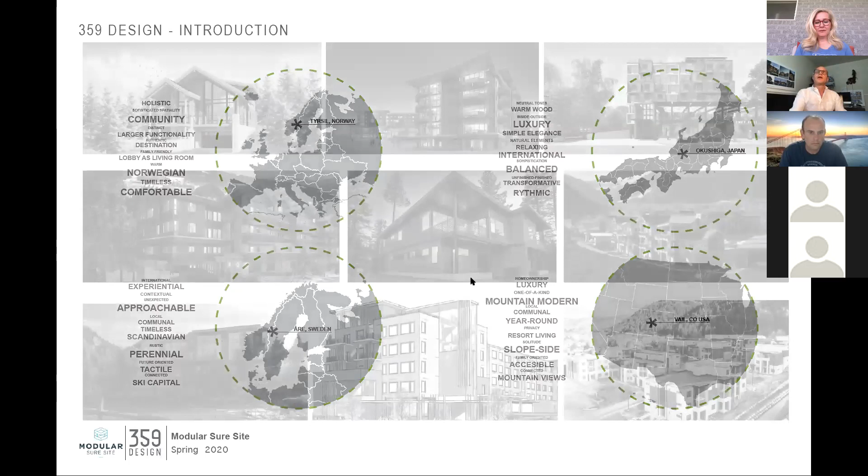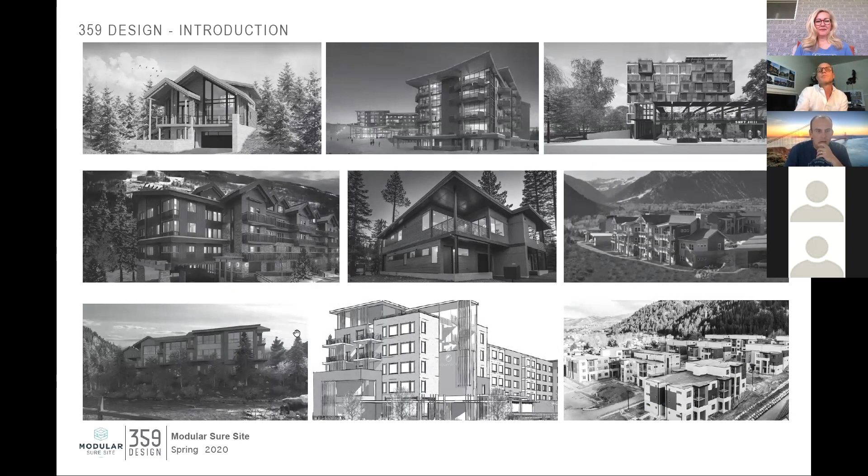Just a little smattering of some of the work we do, to give you an idea of scale, shape, texture, form. Most of these projects I'll give a little snapshot on, but let's just start thinking about that. We're not going to spend a whole lot of time in this world here - we'll get into this world, but we really like these in the middle here and these all around. So that's what I'll be basing my conversation on.

So why modular, and why did we get into it? This site plan you see in front of you is Chamonix in Vail. We, and also I, have a long history in Vail. I lived in Vail between my undergraduate in college and going to University of Pennsylvania for my architecture degree. I'm a homeowner in Vail, and have spent time in resort climates, in affordable housing and workforce housing. We've established a great relationship with the town of Vail, with Eagle County, with the councils and commissioners, and have worked a fair amount on workforce housing. So if there's one of those pocket places where it works, Eagle County is good.

But the Chamonix site - we had been working on it for about a year and a half, going to the council with a number of options.

Short side of the story is that they had overpaid for the land, and then only had a certain amount within their budget. And they said, absolutely, line is drawn here.

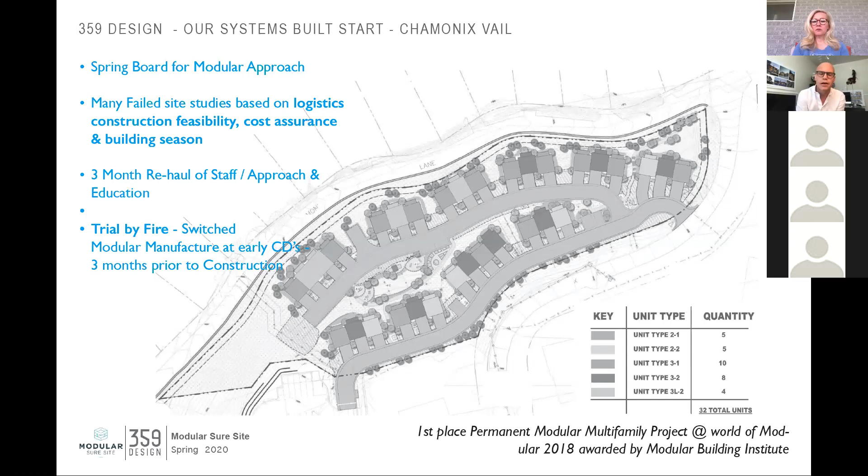Anyway, at the end of the day, we got the project done. Some folks online were involved in that project, and this recently won first place as a permanent modular multifamily project at the World of Modular in 2018 by the Modular Building Institute.

So on to volumetric modular. So what have I been talking about? What is, for those that are somewhat familiar, somewhat not familiar.

Well, you know, in the way that we go and the way our world goes, we tend to, unless we get into our resort side, tend to build with wood. And building with wood, there are a number of different ways that you can get this done. You can stick frame it. You can, you know, go out, hire somebody, stick frame it. You can builder developer it, which means that, you know, on board, you've got some efficiency from your staff, and that's going to sometimes lower the cost of the project, lower the time, lower the experience of the project.

And then we have systems built, right? So systems built, for those unaware of the term, systems built talks about all of these things. It talks about modular, it talks about volumetric modular, it talks about panelized. It talks about things that are done within the factory or within some sort of controlled environment and are put together in parts.

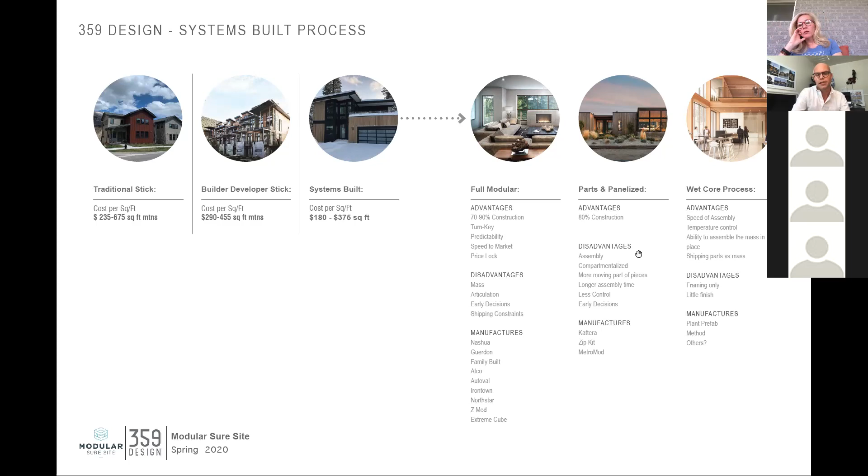It's not the individual sticks, but it's panels, it's pieces, it's larger things. So, you know, as we start to look at that, you see that we have full modular, we have parts and panelized that we dabble in from time to time. And then another piece that we're starting to go for certain projects, and we'll see where this goes, is a wet core process, which is basically a combination of modular and panelized. So where we get the wet pieces of the building, put those in modules and do those, and then we have shells and panels that go around them.

So we're here to talk about volumetric modular. Volumetric modular, great for these types. For single family, it's great for hotel, it's great for multifamily living, affordable 2-story walk-up, 3-story walk-up, 4 stories with a corridor, type 5, type 3 construction, all of those things, okay? We like to, with our product, like to get into the 60% range, where I can say 60% and above is being done in the plant, and we'll talk about why I like to do that.

So, volumetric modular, a couple diagrams here. This is what is called a module. For those that are very familiar, just bear with me for a second here. The module is this piece, and it's, you know, anywhere, you can make them as small as you want, but your efficiency is going to get killed if you go under a certain range. But 8 to 16 feet wide. Some plants do them as 19 feet 6 inches and up to 76 feet or so. This that we're looking at is considered a module.

In the next bit, I will show you what a saw box is, for those of you that have heard that piece. As this goes down the line, some of my favorite plants out there have 20 and 30 stations as they go along. They start with a floor, they put in interior walls, they put on their exterior walls, they put on their upper part, and then they move and they move and they move.

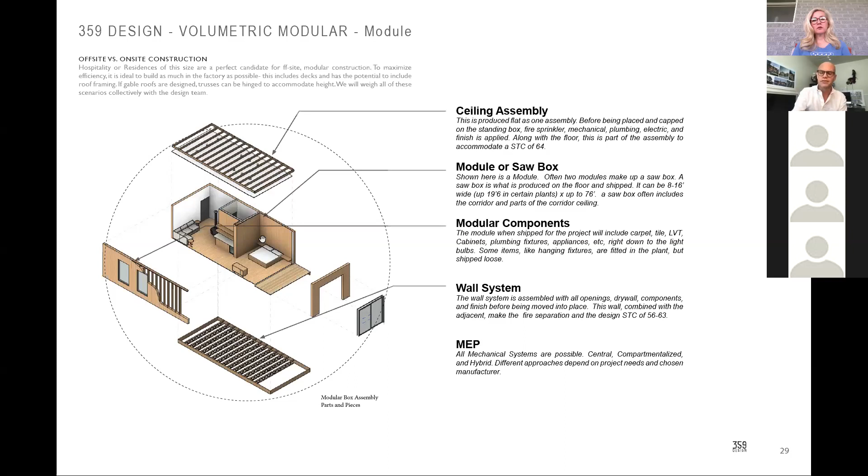You have to be aware of the permitting process. Different states have different permitting. In general, the box, the module I showed you before, goes through the state, and the rest of these pieces - the foundation, the skin, the roof - typically go through the local environment. In some places, that's also in the state environment, but it's a different department.

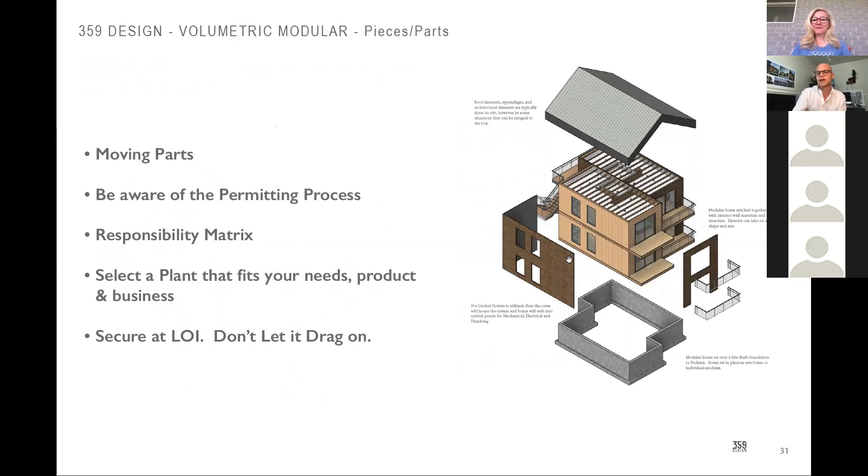Select the plant that suits your needs, right? And when you come to this, secure your LOI. These are just big things, but I'll talk about them further in a minute here.

This here is a saw box. A saw box tends to be a little bit more efficient. As you can see, we've got now two pieces, more building mass. When you start to put these together, you're setting two boxes at once, as opposed to one box at a time. So your time on the site is a lot less.

So you see this, these can get long, they can get wide, they can get very heavy. For the setters out there, as you start to see these come around at, you know, 16 feet wide and long, they're big. At a recent project, we had some townhomes, and I'll show you it, where the boxes that went down the road were 19'6" by 72 feet. That's a really big and really, really heavy box for those that know it.

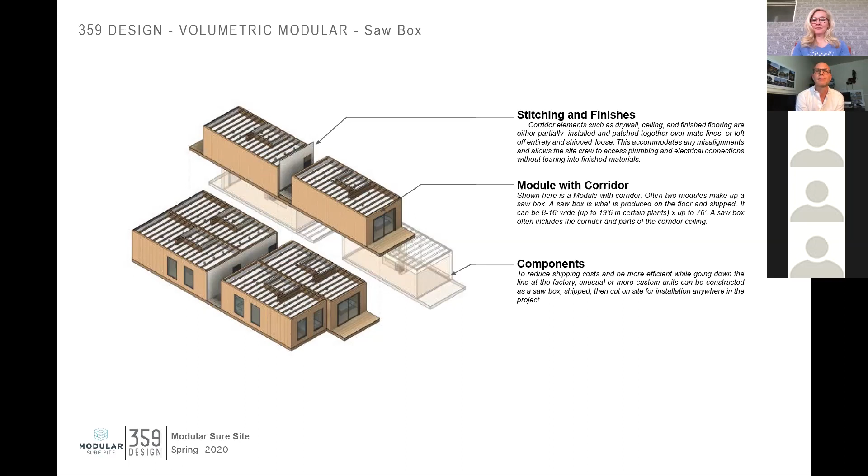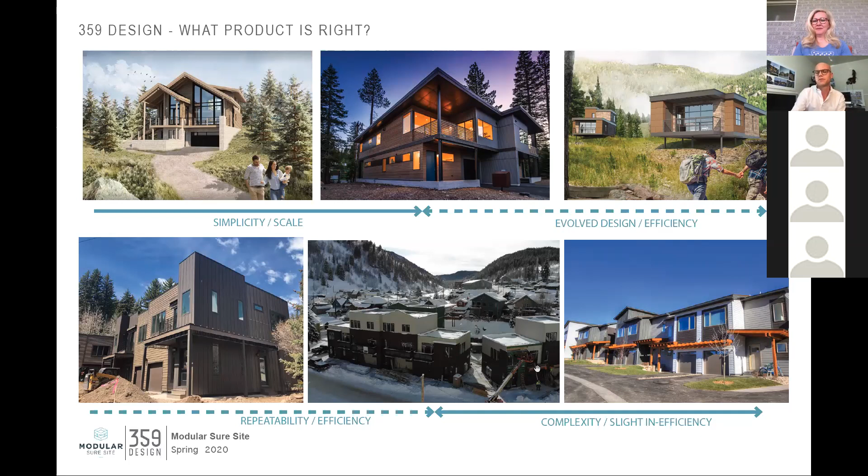As you can see, it requires some of the decks, some of the outer pieces on there. We'd like to integrate those as much as we can. You can see we were able to do it here on this, but these, we couldn't quite get it, so that goes into slight inefficiency.

So now as we step up in scale, we're starting to cook a little bit. This is the Chamonix project that I talked about in Vail, 32 units. Interesting in the townhomes, but I think the number of units, the building season, all of that stuff and all those pieces allowed us to do a really good job. I had a great team on that between Nashua and Ari Nelson in Vail, working on that.

Next to it now, we're starting to get into what we like, right, where we get great efficiency. 3-story walk-up, wood frame, so 3 stories, no elevator.

This one starts, you see that I've got a little bit of a solid line in there. Reason I do is because I'm on a sloping site and I've got some complications as I come within there, setting my boxes a little bit subgrade. So that's getting a little bit technical, so I'm going to move on to the other piece, the Georgetown project.

Georgetown, and you'll start to see this going up on the road right now. This is on I-70, hard to miss. The first 12 townhomes went up last summer, and on it right now you'll see there's a hotel going in there and a brewery being constructed. The units that are up there right now, 12 units.

So I'm going to talk about two different project approaches here. There are a number of ways to do projects, a number of ways to come up with your design, come up with the most efficient approach. I'm going to talk about two of them. There are hundreds, right? But we'll talk about what gets us, what starts to get us, what I'm calling here a holistic project.

This project is a project that we're currently involved in right now that is in Lake Tahoe. It is a hospitality-based project. In this, we really get into it and everyone's gung-ho. What is the best solution? Which way do we look at this, right? Which way do we do it?

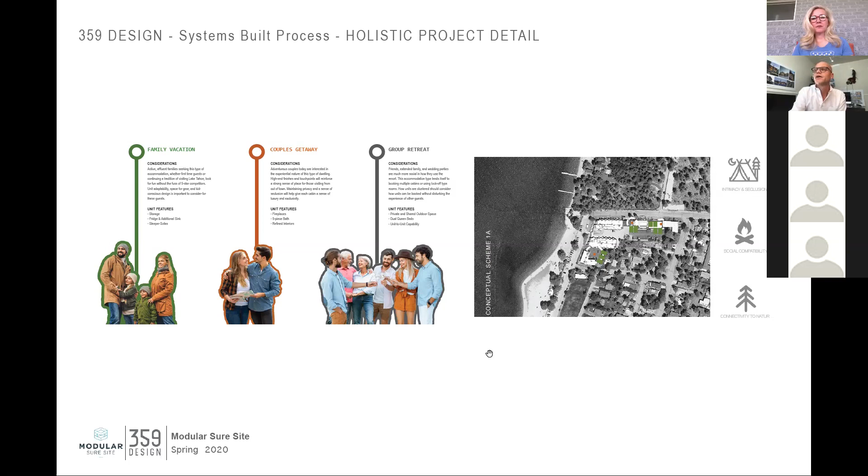For us, the way that we approach this is we look at the demographic. We look at who is going to be there, who's going to be using it, what are they going to think about if it does go to modular, about sleeping in modules? Are they going to think it's weird? Are they going to not want to do it? Probably not, but those are things that we consider and questions that are asked. What are we looking to do? What are our themes as we go through?

We come up with an architectural precedent. We come up with look, taste, feel. Where does this go? What does this start to do? And we start to steer this into something of design.

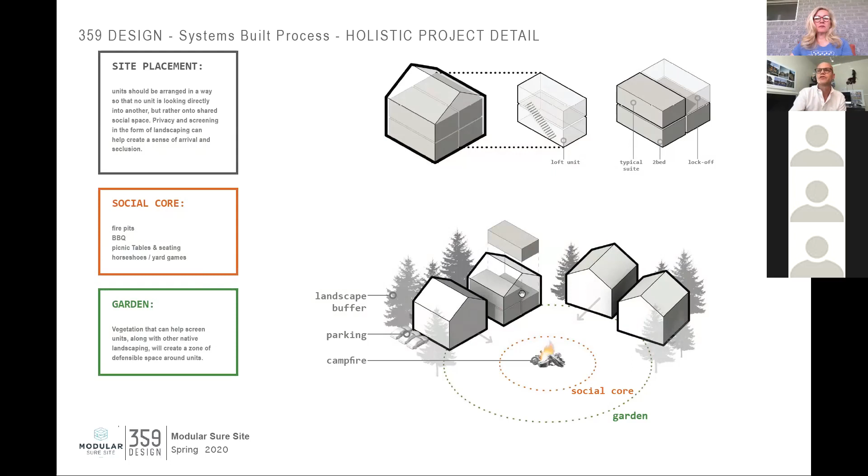We then come up with somewhat of a parti from there. We build these things around, and as you can see, we started to say, what do these hospitality cabins look like? How do we start to build them? What are their shapes? How do they get put together? What's really important within them?

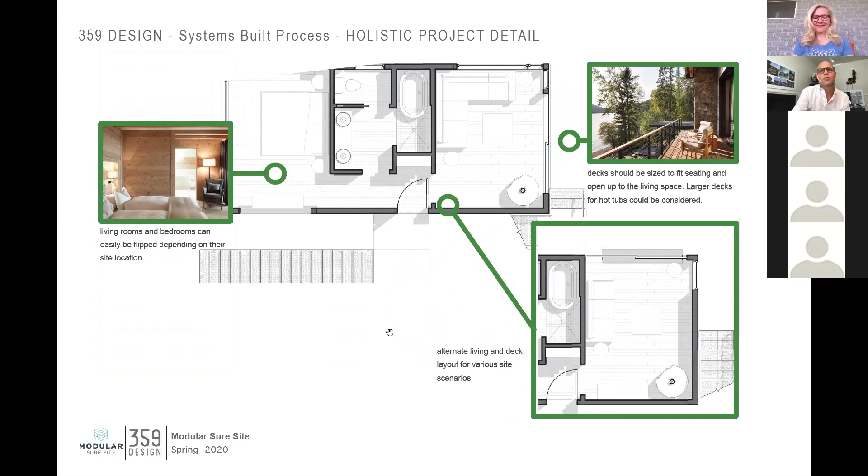We then go develop a unit plan. This unit plan, as you can see, based on modules, based on interchangeable parts, is going to work really well for us. We take those, and we then stack those into architectural form. This is all taking everything that we learned before.

Now everybody's got something that everybody believes in, everybody does it. This is where we somewhat say, end of concept design, let's move on, let's start to get this into pricing, but we know we can do this in modular construction.

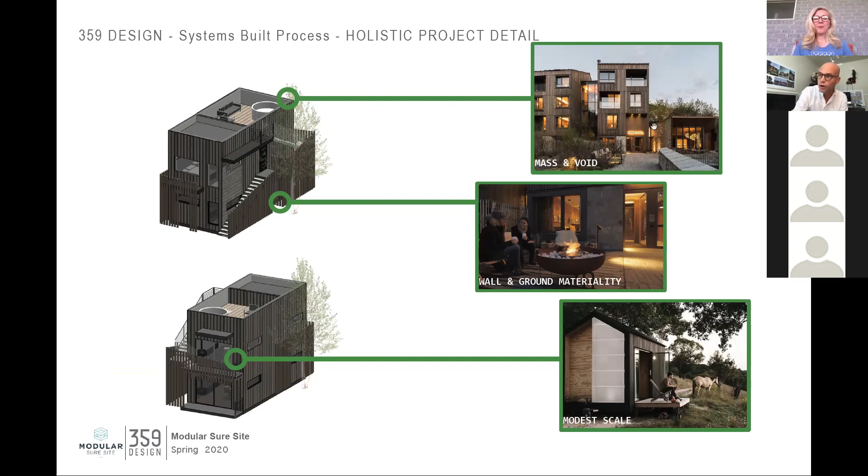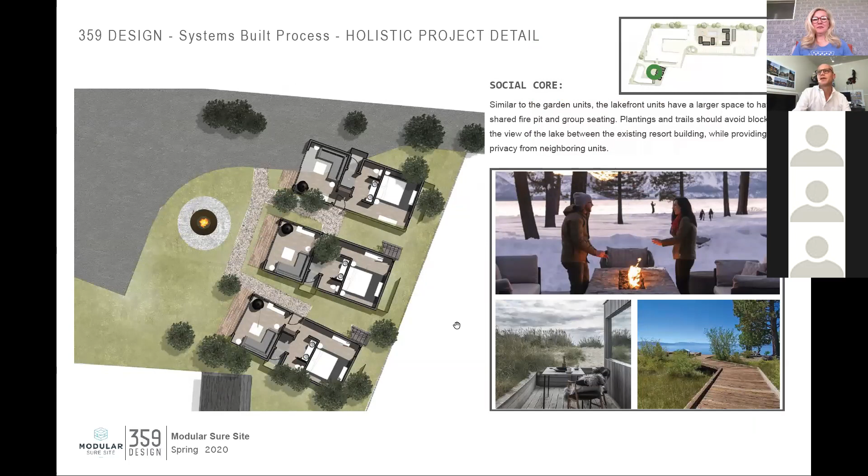What we also like about these boxes here is, as you can see, aside from this piece, all the rest of that is going to come from the plant to me onto the site. We can probably also do some siding within the plant and when we put it together. So going for the simplistic architectural look like that comes into a site plan, comes into something that's very livable and very developed, and you got a winner there. So that's one approach.

Another approach that we like very much is what we call a unit-based approach. This is with someone, whether they be a large developer or small developer, but they know what they want. They know what their demographic is. They know what their market is. They know what their unit size is, and they know what sells to the market.

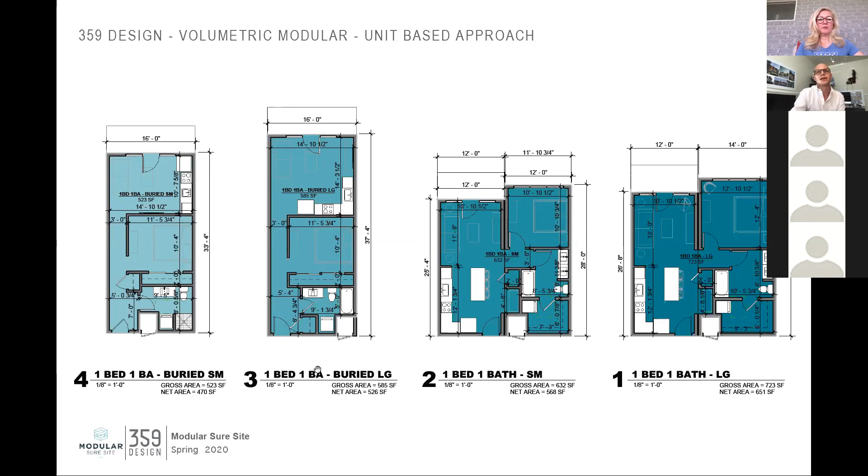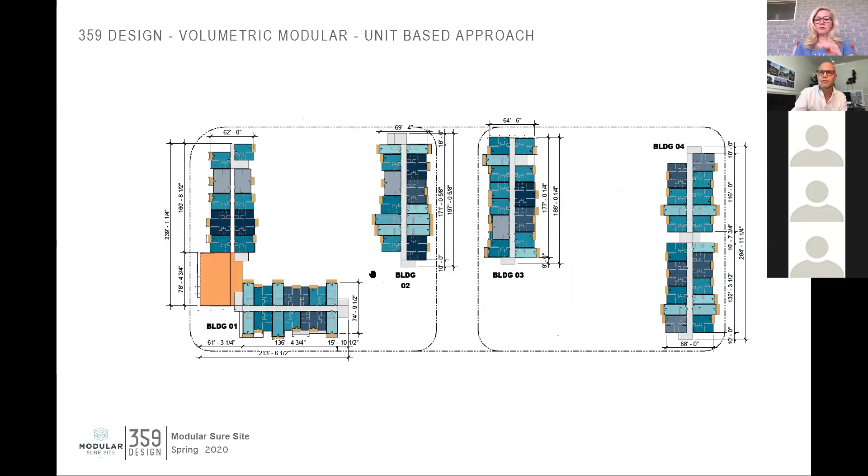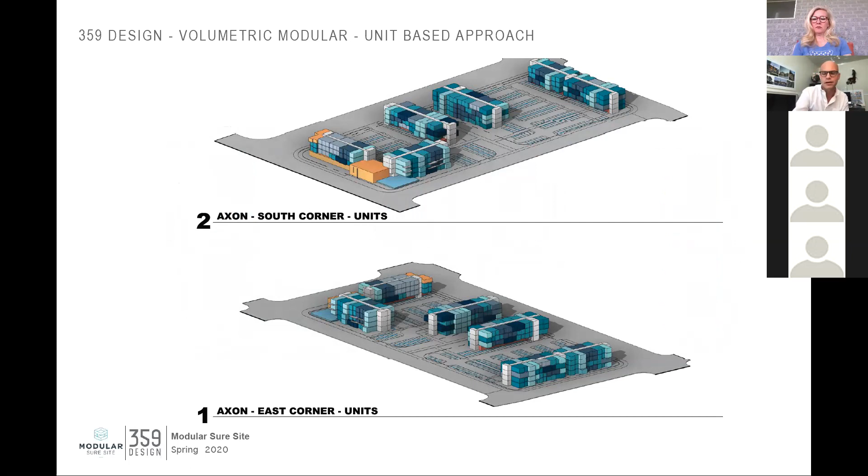This says, okay, now we set out a site plan. We start to set these boxes. We start to get these repeatable elements. We do get some site frame pieces, but it starts to cook and it starts to go. We mass it up into early pieces. All the while, from the first conversation, from anything, we have drawn based on boxes, based on modules, based on efficiency within here.

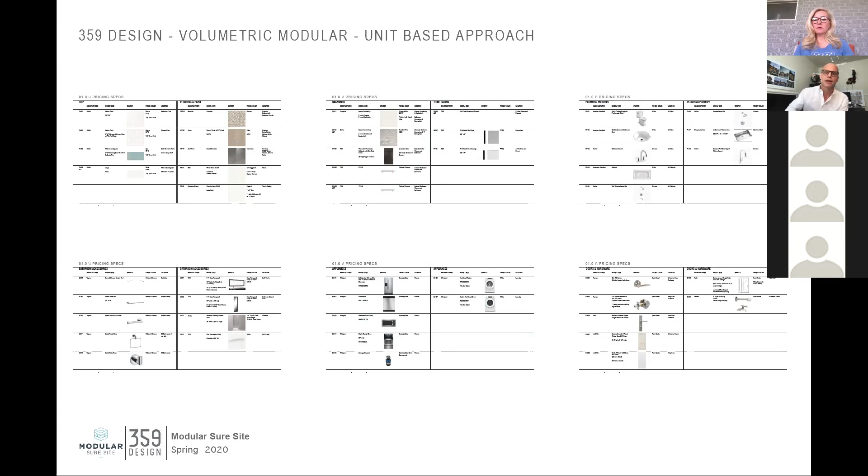We take this, as you can see up on the screen, we've got what we call pricing specs. So within this product, for maybe 10 or 12 different products, we have different specs that'll go in there so that any plant looking at this, we leave it open to them to either specify what we have exactly on there. Most of the time we try to put a performance spec in there to let the plant use what their best leverage is in order to compete. And then from there, we dress it up and give it some style, some character, some feel, so that when this starts to go out, it gets priced.

But like I said, all the while, on this type of project, unit-based approach, the developer knows what he wants, knows that he wants this efficiency in it, and goes from there. This particular project was for a large national, international developer. They were looking for standardized modules that they can use from location to location. We designed a number of different skins for this that can be put on and changed in style, but we know it works and we know where we can change it from place to place.

So, good reasons why to do modular construction, right? You have assurance of a consistent and solid product. You know what you're going to get from the plant. You know what your plant is going to produce.

We're going to say that you can save time on the project, but that time is going to be saved on the back end. You can't come to us and say, hey, I've only got 5 months and I need to do a multifamily project, I heard modular's the place to go. It still takes the same amount of time, but we think we can get you to the finish line faster.

You can control things, right? If you are a control freak, all of those pieces, you can control in modular. You know what you're getting. You know what you're getting on what date. You can target windows to say, this is when I'm going to build. And if you plan right on the front end to bring it all in, it works great.

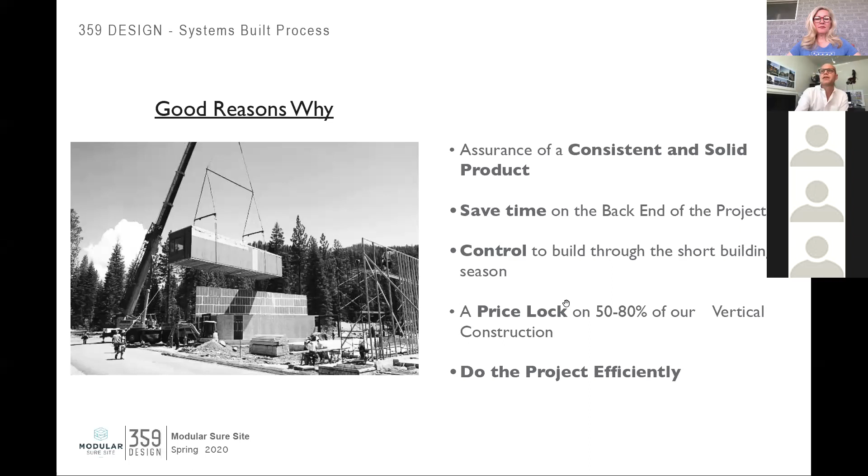So, bad reasons why not to do modular. We have a number of people that come to us, when a lot of people were pushing, on a weekly basis we'd get calls saying my design development pricing came in 30% over budget. Somebody told me I can do modular and I'm going to save a bunch of money. Well, that's not a good reason to do modular. By the time we re-engineer it, unravel it, put it into modules, we're spending design money, we're spending time. I heard I can get a deal on some modules, I heard somebody might have some modules lying around and this is going to be a great idea. Doesn't happen. Maybe every now and then, but very tough to do.

And then word is, you've got a previous design that's going to work really well. Can you just take it and fit it onto my site? You probably have documents done, you've probably got this, it's going to work out great for both of us. Well, it doesn't work great for either one of us at the end of the day. So we've been through it, and that's why we wouldn't do modular.

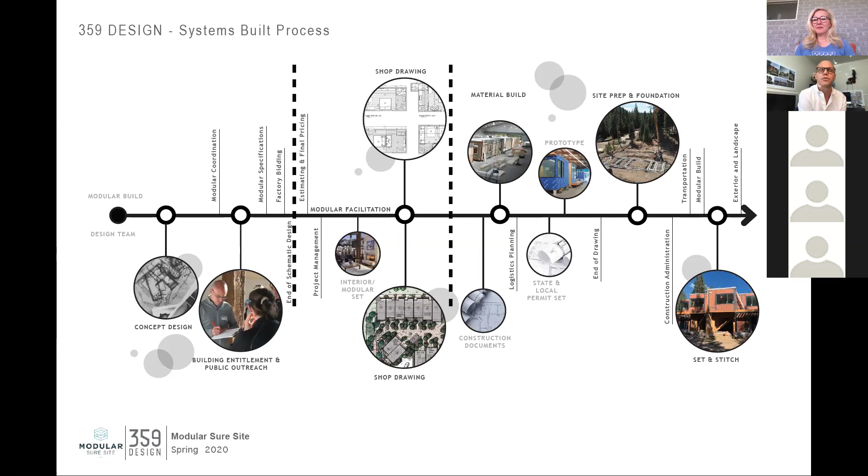We use that schematic design set to talk to the modular group to get our price and to get our relationship off on the right foot with those pieces.

So how can you go about this, knowing that this is a process? There's a number of different ways to buy a box. Anybody, I think if you want, we'll sell you a box. There may be some people that don't, but most will.

What we often see is sometimes before projects come to us, the client has gone directly to the plant. They often go too early, and we see that the relationship gets stale. They don't necessarily have a concept, and these things tend to drag on. We know the plants somewhat like this because they can get the developer under their wing and say, we've got you, you don't need to go anywhere else.

Another way is that a client might send an architect's early drawings that aren't drawn as modular, that are underdeveloped, out to the plant. That's going to go in one pile, another pile that they like to look at, and another pile that goes through. As we've heard, though we don't have proof, we understand the prices can vary that way - again, my opinion there.

So oftentimes we have the general contractor or the owner taking a DD set, and it's probably too late - it's probably not designed as modular, and you're going to have to unravel it and go back.

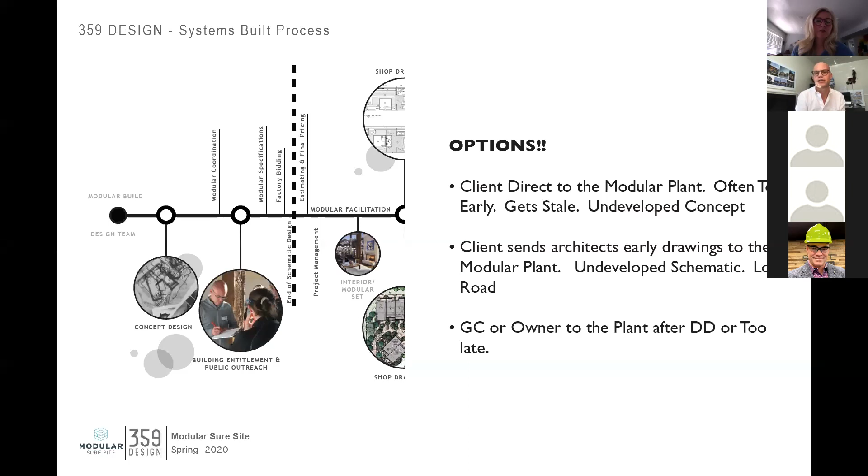So the way that we like to do it, we like to work and develop a concept. We like to vet it through our team, most of whom are engineers. In general, we've got about 70 to 90% of our consultant team that has done modular, has done systems built, and knows what to do on these projects.

We take the concept right through development and vet it through our team. I can't mention enough that to be successful here, you've got to design the modules as modules right from the beginning and go through it that way.

So as we go through, we develop that concept, we vet it through our team. We make the initial introduction if our client doesn't have a relationship with a plant. We might reach out to 2, we might reach out to 6, but we like to get them in front, get them kicking the tires, and say, hey, this project is coming down the line.

We'll often get the question, can we see your drawings? Can we see this? Of course you're going to see them, but I don't want you to price them at this point. I want you to just know that this is a real project and it's coming down the line.

Out of that initial contact, we may say, let's get a short list of plants. There's going to be plants that work for your product, and plants that don't work for your product, but we'll be able to find you a match.

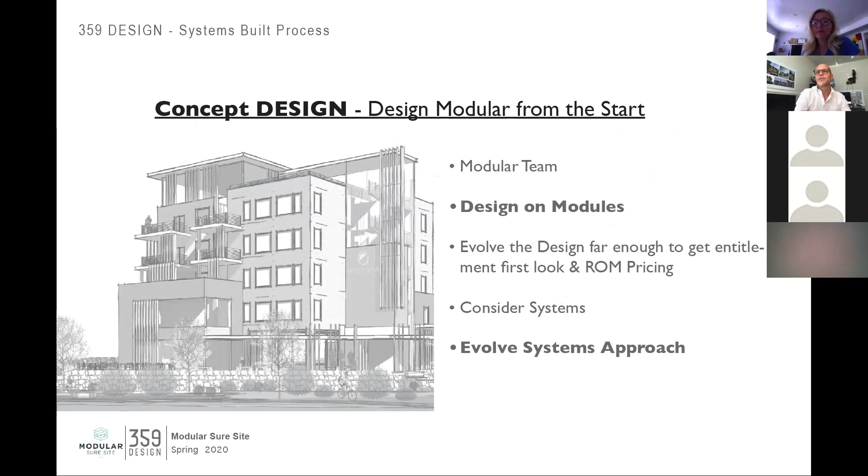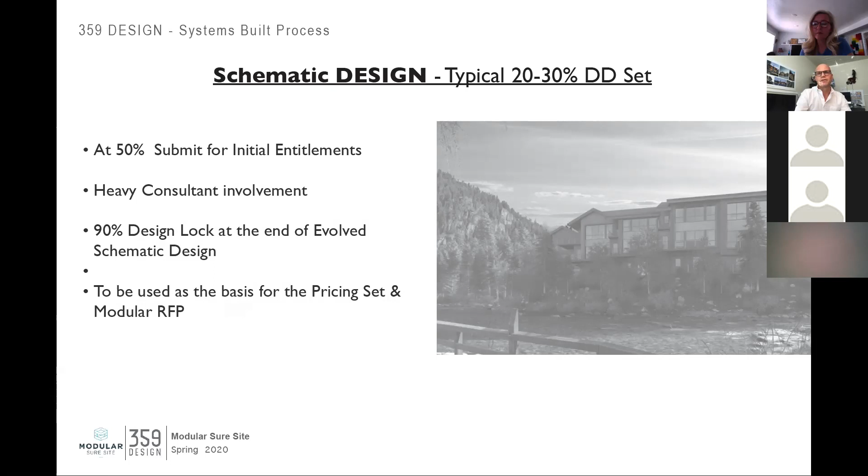So just to slide through, you can read these as I go, but again in concept design some of the early things we do evolve the approach. We get systems very early on. Within schematic design, we have heavy consultant involvement. We've got a 90% design lock on the boxes at that point, and we develop it so it can be used for a good pricing set and a good modular RFP.

For that pricing set, we bring in a third-party estimator. Oftentimes we don't engage a general contractor unless they're a seasoned modular general contractor, because the first or second time through we tend to get very large prices that don't necessarily represent the overall picture. That's why we bring in a third-party estimator, to help keep us in line with those pieces, and then somewhere in design development we bring it out.

We're personally big fans of having the owner purchase the boxes directly as opposed to through the general contractor. If we have them do it through the general contractor, then it's an open book piece as we go through.

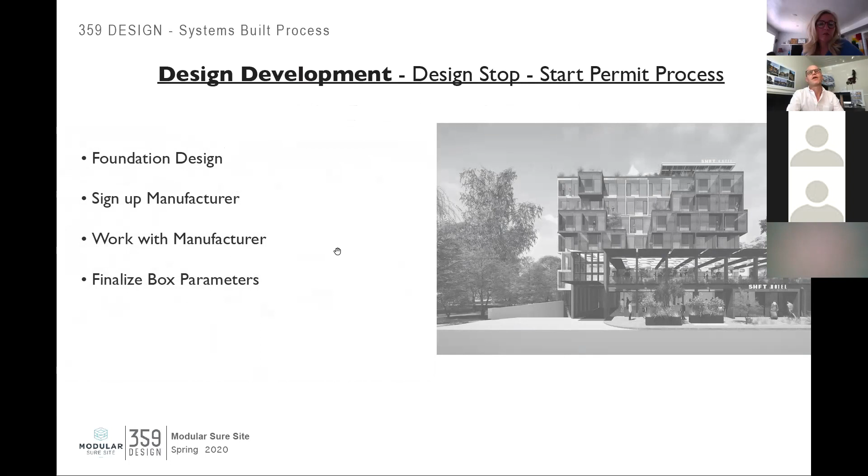Then with everyone involved on the team, we get to design development, sign up the manufacturer, and work with them to make sure all those pieces are right and working with us, and we finalize the box parameters.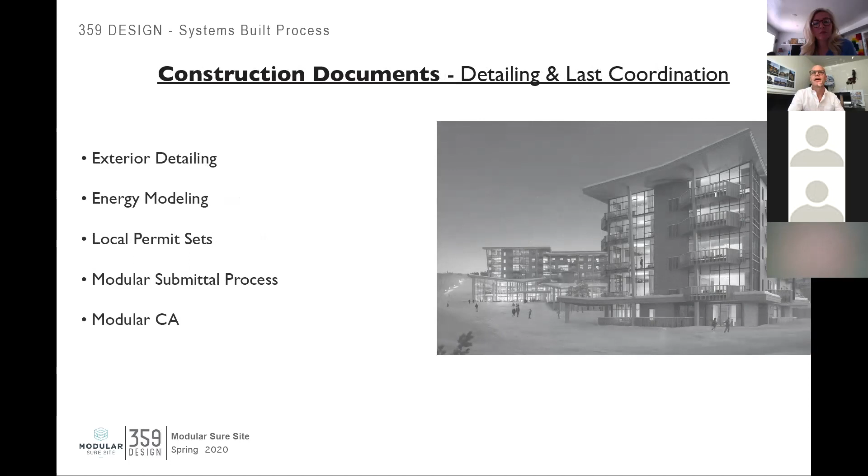We use that often for the state permit, and by the time we get to construction documents it's coordination, energy modeling, skin. We're probably going through the modular submittal process, and into modular construction administration by the time we're submitting for these. A couple detailed projects, and then we'll wrap it up with what's to come, what we're doing.

I promised to share with you a little bit of the international work. People tend to like it, but for a ski resort in Sweden, very straightforward - everything goes without saying that we're designing this as modular, it's going to be done as modular.

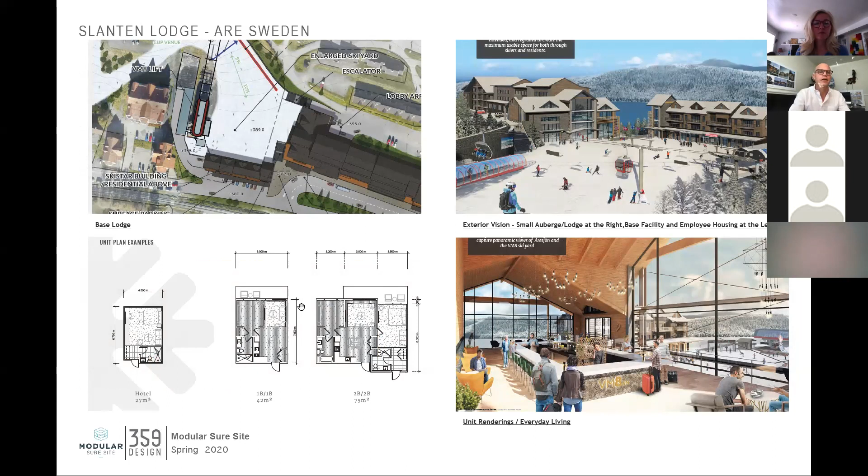The boxes are going to have a whole lot of wood in them, a whole lot of those things. They're going to be different boxes, but that's what it looks like. So we like that, we have a lot of fun doing that.

This project in Palisades, outside of Squaw, is a 70 unit project, a combination of duplexes and single families. I showed you this a little bit earlier.

What was interesting about this project is, given the volume, they went through 3 plants - Plant Prefab, which should say Zip Kit, and Method Homes - and had them each build 2 of these in different forms to see what the relationship was like and where it went. Ultimately they didn't select any one of the 3; they went about building their own plant, called Foundry, and we'll see how that goes.

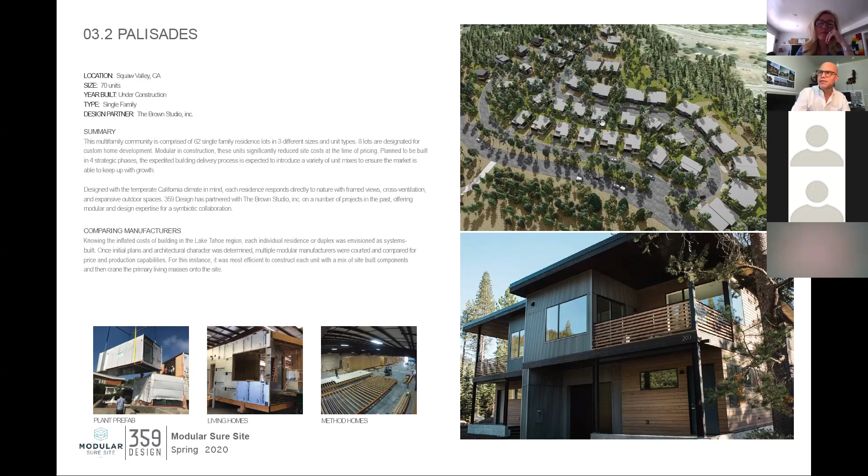Hopefully we can check back with you in a while. I was watching video over the past 2 weeks, and we've got a call tomorrow - they set these 6 here, and these 6 are already in place, these went up this week, and these boxes here are under construction right now in the plant.

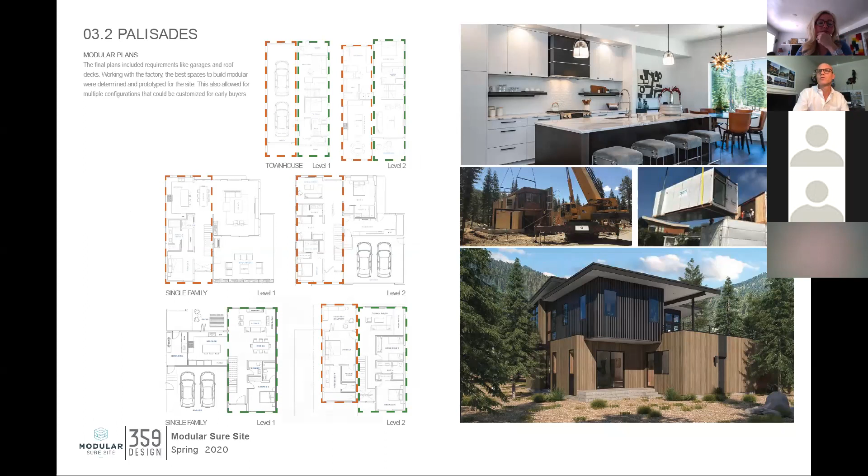But as you can see, the plan is very modular - you can see a very clear delineation of what's modular and what's not. This project that we love is in Georgetown, but can be used almost anywhere. Very simple boxes, though it does go on the wider side, which limits the plants that can take it on.

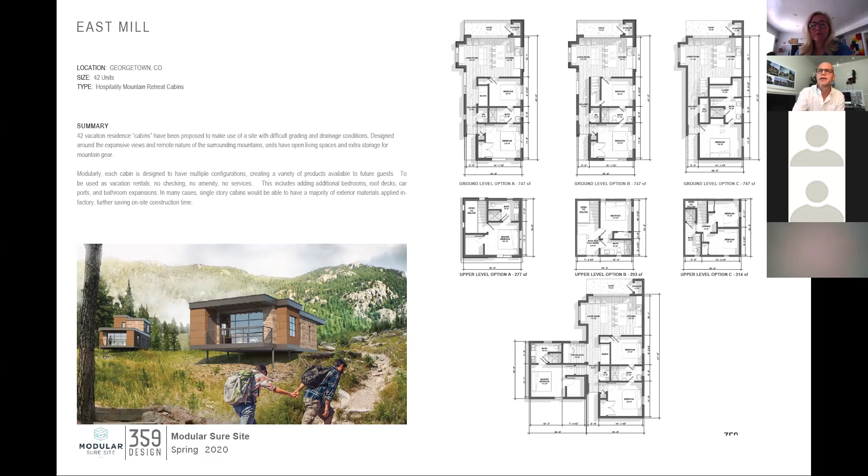But these general pieces of just being able to put them down on the site and live very well. This is a project, Trysil Alpin Lodge in Norway, 144 units. This will focus more on a wet core approach.

So generally, as we go with these projects, we design them to a certain level. We set it up for success. We use our resort knowledge, our history knowledge. It's amazing, if you go to Norway, Sweden, anything like that, the first thing they'll ask is if you've worked in Aspen. If you've done Aspen, then they want you to do the project. So it's often odd to be sitting at the table with architects and designers that I'm way out of my league within, but we work together. Generally, we draw them and then they convert and take these pieces, so for them it's a little bit limitless for what they can do.

This is the Georgetown project that I showed you before. These are the units that are there right now, the hotel being built right now, and the brewery. These are the remaining townhomes that will be scattered throughout, and these are the multifamily three-story walk-ups. Those three-story walk-ups on site, I don't know if there are any new townhomes getting ready to be set on the site, but all of these will be to come. I think we're getting ready to shift manufacturers again on this project, to find our sweet spot.

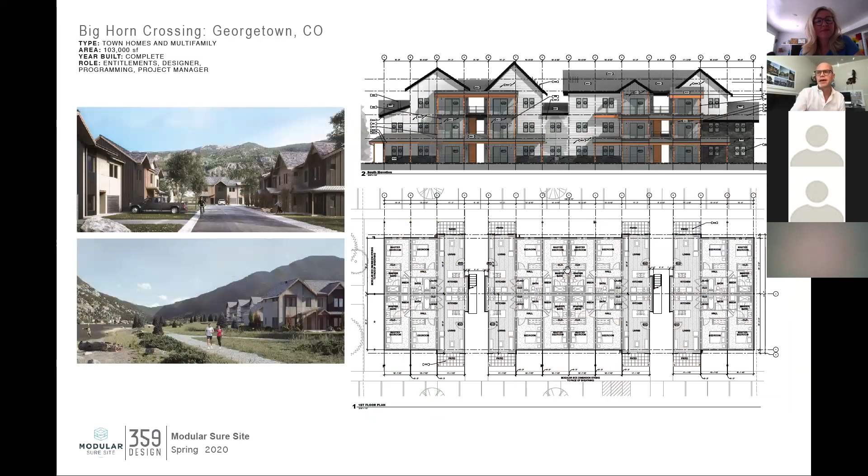But as you can see, everything lays out in a very modular fashion from there. Even the townhomes go and work incredibly well.

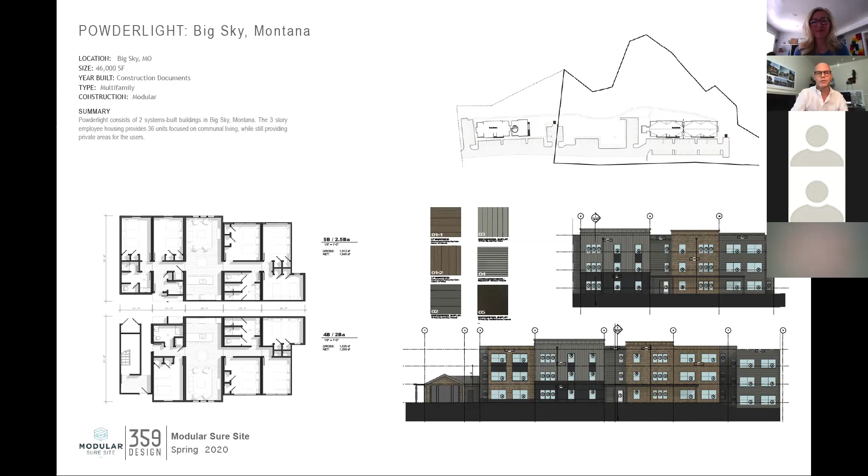So a project in Big Sky, Montana. One of our partners doing this project with us is online right now, so shout out to John Moon within this, and Nashua Construction. John, we're getting there. So we're coming through, but the general idea out of this is to provide and do a very repeatable workforce housing development that can go from site to site. So we've got this site, we've got another. We're starting to move on to other sites that are very similar, taking a very similar design, changing the skin.

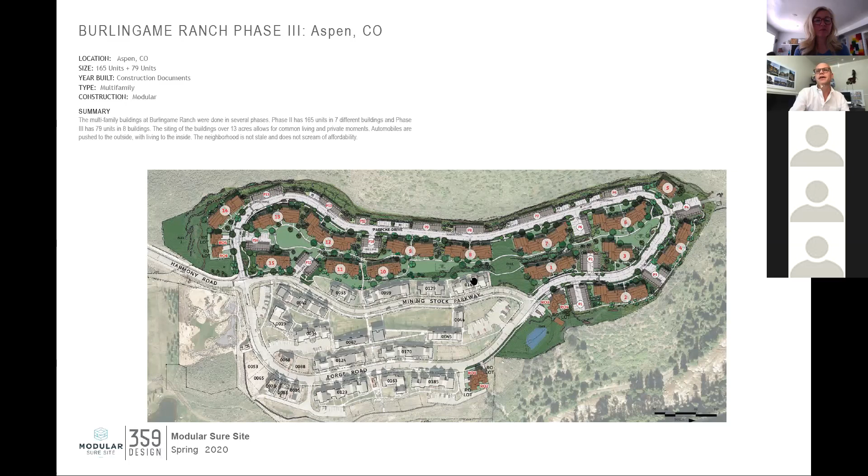Burlingame Phase 3, which is this part of it. I designed this portion when I was previously a principal with Oz Architecture, did these single families as 359 Design, and then we recently won this project and we're taking it and doing the next phase as modular construction. So those documents are in process right now, and they will be spring of '21 construction.

But as you can see, we designed this project initially in 2010, 2011 as modules. At that point we were coming out of 2009, out of the recession. The City of Aspen basically said, we want to keep all of our dollars here. Even though you can save us this amount of money and it can be faster, we want to keep our dollars.

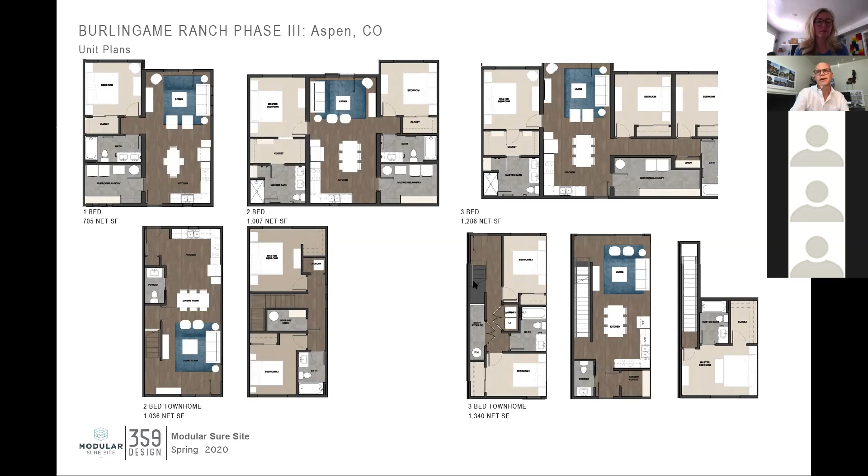Coming back to it six years later, we did it right, we didn't have to change much. We did have to go through a significant re-engineering of the buildings and what have you, but good parts and pieces. This project does fall in the not-perfect as far as modular goes, because it's two-sided, not a double-loaded corridor off of there. I get a fair amount of deck ticky-tack and that sort of thing as I push along.

So spin in here, and hopefully I can move on. So, with that, Audrey, I'm two slides away from wrapping up, and it looks like I'm spinning away. Do you want me to wrap it up? Just keep going. Yeah, let's wrap, and I'm ready.

So, in our wrap up, what we would say in order to make your project successful is commit from the beginning, commit to doing it modular. Let us draw it as modular. Let us take it through schematic design. Let us do those pieces. That's going to be your best success. We will guide you at schematic design. We oftentimes get stick price and modular price at the same time, and we decide at that point, go, no go, from it.

We've learned that modular is an incredible relationship-driven group. They like to see the white in your eyes, they like to sit across the table, and they like to do that, so be ready to do that. Have patience with the project, with the process, stick with it. Get a modular team. If you don't have everybody modular, at least get somebody who knows it and somebody who's ready to lead it. Get third-party involvement, there are a lot of good consultants that do this. And again, modular is great for full team buy-in and building something.

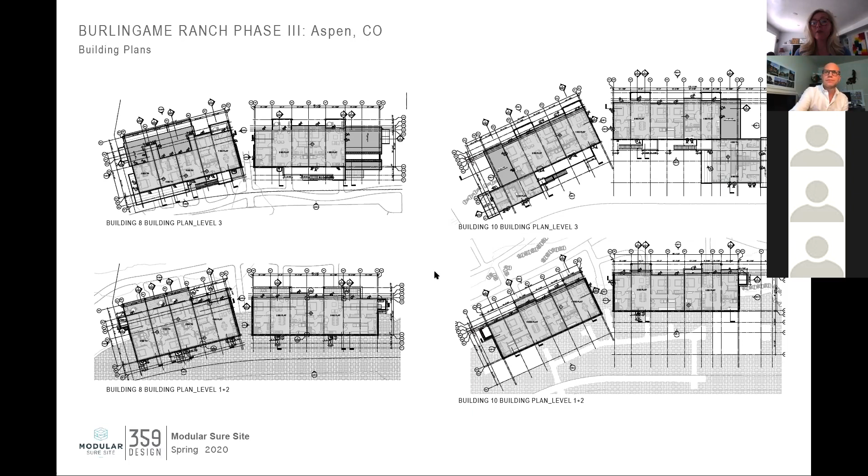I have a question for you. You said that you get stick pricing at the same time you get modular pricing. What do you find usually comes back as lower, or what can you speak to about that a little bit?

Sure, it'll depend on where we are, and also the product type, who tends to be hungry. If it's a double loaded corridor building, a 3-story walk-up in the mountains, it's going to be pretty hard to beat modular. If it's going to be front range, I think we're at about a threshold, so you start looking at time, you start looking at assurance, you start to look at those things.

Oftentimes, when we do this exercise, we tend to have developers who aren't committed. They might have a partnership with 4 or 5 people, and some of them are going to be very much into it, and some of them are going to be naysayers who might have a relationship with a general contractor, saying we can do it a different way.

So what percentage of your projects would you say have gone modular versus stick built? That we start out on modular that go forward, I would say 90 to 95% of them.